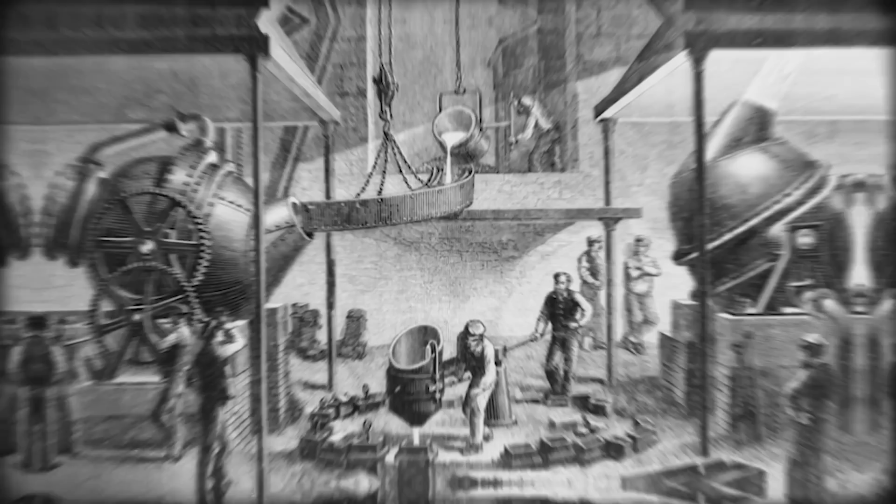Before the world knew Sweden for Spotify or IKEA, it was this steel company, Sandvik, that was quietly changing the world from deep inside the earth. This is a story about a company that always moved forward, from the first steel mill in a frozen Swedish village to inventing tools that mine deeper, cut harder, and last longer than anyone else's. They built the drills that carved the tunnels, the tools that built the factories, and the steel that built the modern world. And it all started with a bankrupt entrepreneur who gambled everything on a new way to make steel, a method so radical even his partners walked away. This is the story of Sandvik, the steel company that refused to stand still.

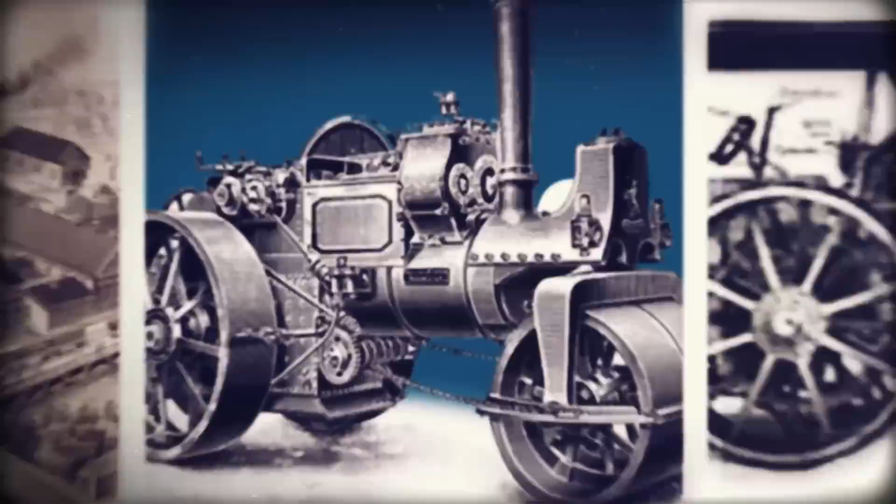In 1857 Sweden, Göran Fredrik Göransson heard about Henry Bessemer's failed steelmaking process. While others dismissed it as impractical, Göransson saw potential. His international travels through Europe and America gave him a perspective others lacked. He recognized this flawed technology could revolutionize steel production if modified correctly.

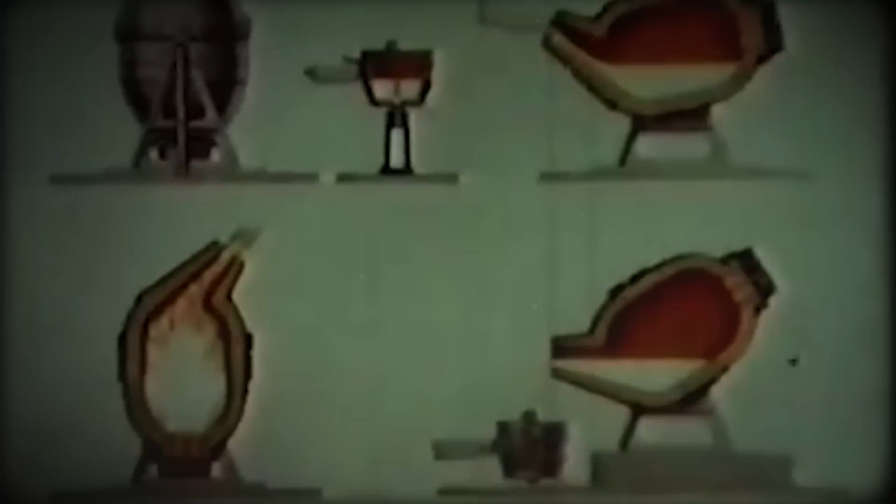May 20th, 1857 is an important date in the history of Swedish steel. That is the day it was confirmed that Göransson from Gävle in Sweden had bought a fifth of Henry Bessemer's incompletely developed patent. Experts claimed industrial-scale steel production was impossible. The process couldn't maintain high temperatures and produced brittle steel filled with air pockets due to impure pig iron. But Göransson's critical breakthrough came when he increased the air blast strength, successfully producing industrial-scale steel by 1858. His Swedish operation outperformed Bessemer's English attempts, making mass-produced steel economically viable worldwide.

This success led Göransson to found Högbo Stål & Jernwerks AB near Sandviken in 1862. He chose the remote location strategically for its iron ore, forests, and water power. There he built more than a factory. He created an entire industrial community with worker housing, schools, and hospitals in previously uninhabited land.

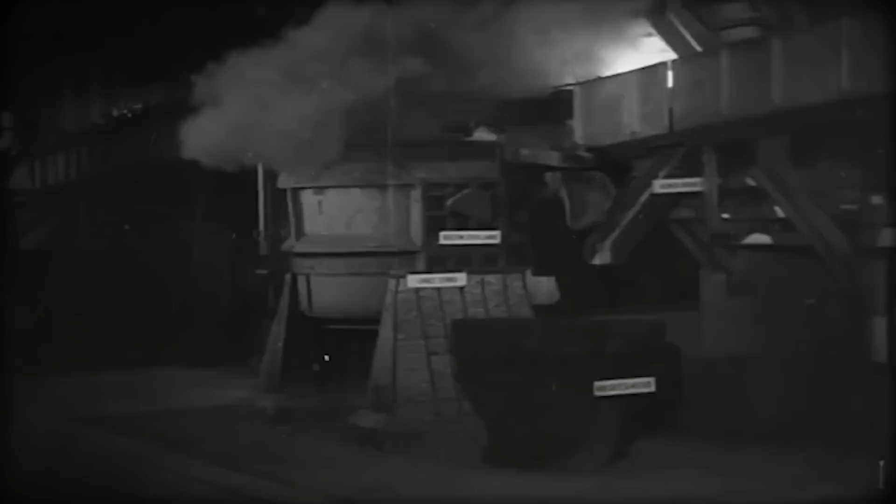The early years brought turbulence. In 1866, after just 4 years, the company went bankrupt when Göransson's main backer, Johan Holm, faced financial troubles. But in 1868, Göransson's son, Anders Henrik, restructured the business as Sandvikens Järnverks AB. The Sandvik name debuted publicly at the 1876 Centennial International Exhibition in Philadelphia.

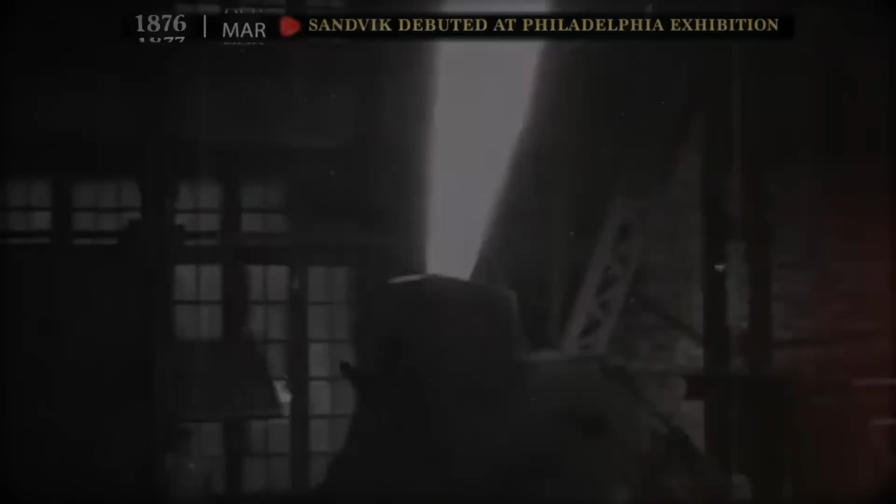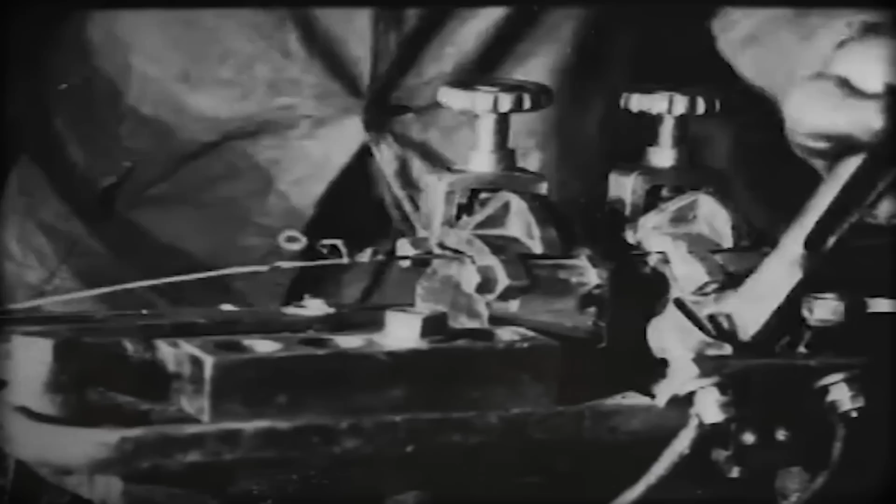Sandvik's early products built its reputation. Specialized drill steel became its first successful European export by 1878. The company also produced railway tracks, springs, wire, and precision components, each reflecting Göransson's commitment to solving industrial problems through innovation.

Göransson implemented unusually progressive worker policies, insisting families received equal rights to management. 'They have paid the same amount for their seats as the rest of us,' he declared, extending this philosophy to housing, education, and healthcare. These practices set a precedent for Scandinavian labor relations.

By 1901, Sandvikens Järnverks AB listed on the Stockholm Stock Exchange, transitioning from family enterprise to public company while maintaining its core values. This provided expansion capital and marked Sandvik's evolution into a modern corporation.

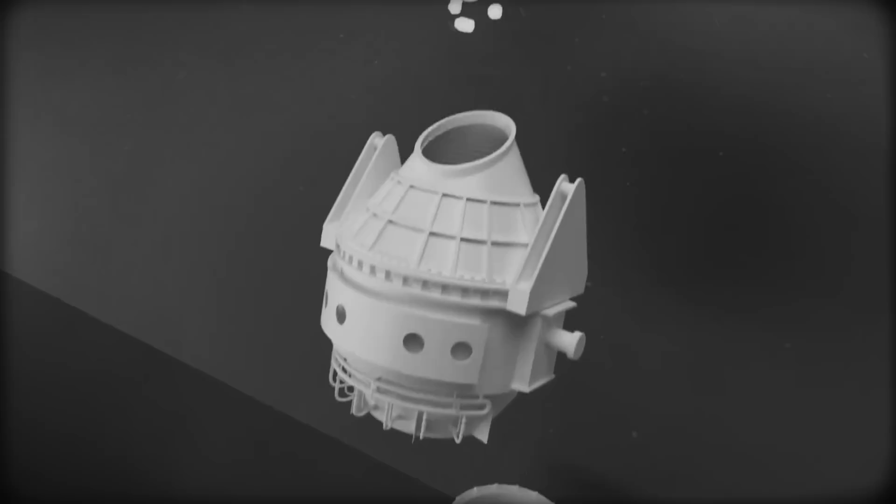Göransson's legacy blended technological risk-taking with social responsibility. His Bessemer process modifications unlocked cheap steel for industrialization, while his worker welfare programs proved factories could be both profitable and humane. This dual focus became Sandvik's DNA, outlasting competitors focused only on short-term gains.

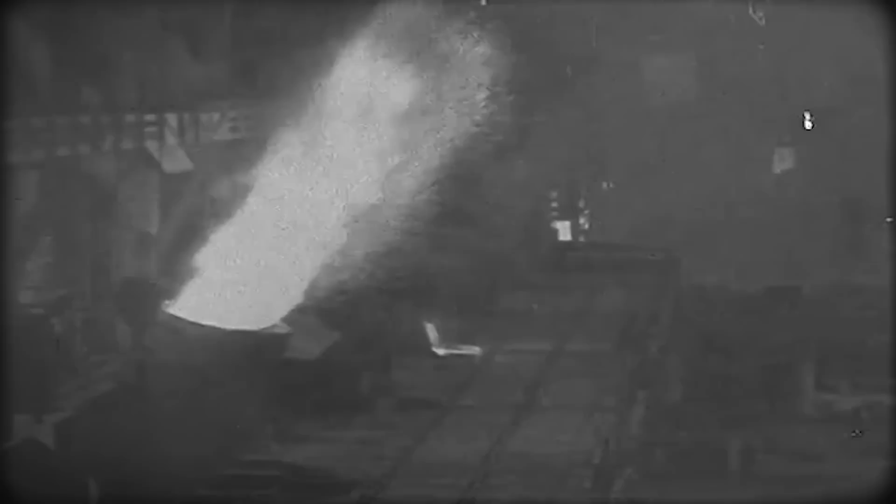Early challenges shaped Sandvik's resilience. The 1866 bankruptcy taught financial management lessons, balancing bold innovation with fiscal responsibility. Unlike contemporaries who viewed workers as expendable, Göransson invested in them as assets, giving Sandvik an edge in attracting skilled labor. Product development targeted practical needs.

Sandvik's rock drill steel solved mining challenges, while precision components met railroad industry demands. Rather than mass-producing generic goods, Sandvik specialized in engineered solutions, creating real customer value.

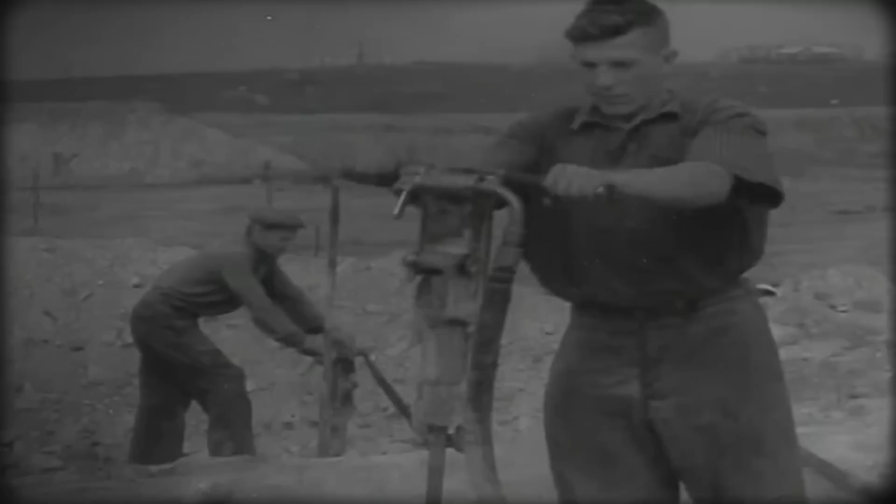International expansion began early. The 1876 Philadelphia exhibition introduced Sandvik to American markets, with its steel drilling equipment used in U.S. mines within 2 years. This global presence buffered against domestic fluctuations and positioned Sandvik as a worldwide supplier.

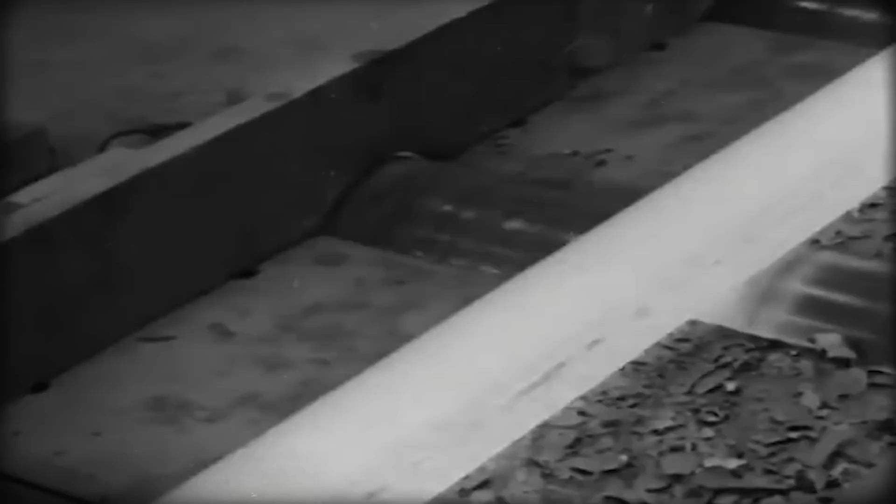Adaptability showed in the transition from charcoal to coal power as supplies dwindled. Rigorous quality control also differentiated Sandvik. Its steel's consistency built trust where competitors struggled with variable quality.

By 1900, Sandvik had survived crises, established global markets, innovated processes, and developed a skilled workforce. More importantly, it established a pattern: identify industrial problems, develop material solutions, and build delivery infrastructure.

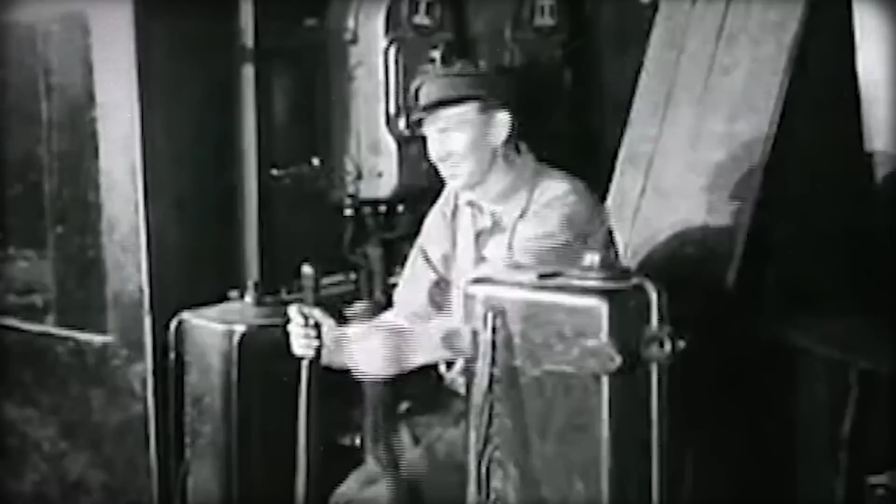Göransson's vision proved prescient. His experimental steelworks became a model for responsible industrial development, influencing Scandinavian labor relations for decades. The technological breakthroughs enabled previously impossible construction projects, creating an institution that would innovate for over 160 years.

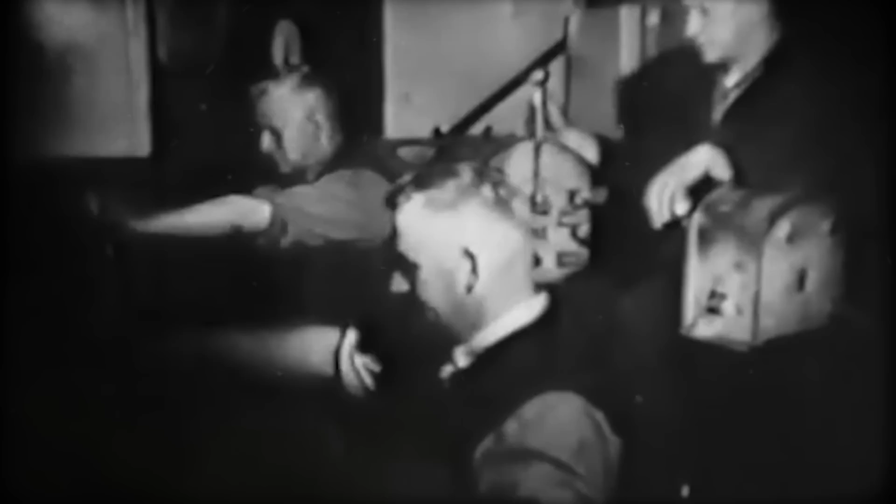At the century's turn, Sandvik was uniquely positioned, diversified in products and markets, with a culture balancing innovation and stability. This foundation would prove crucial facing 20th century challenges: world wars, depressions, and technological revolutions. The early principles, technical excellence, social responsibility, and global vision, provided the compass to navigate each new challenge successfully.

The year 1901 transformed Sandvik from a family steelworks into a modern corporation through its Stockholm Stock Exchange listing. This influx of capital funded revolutionary innovations, starting with steel conveyor belts that outperformed rubber and textile alternatives in harsh mining conditions. The belts became essential for continuous material transport with minimal maintenance.

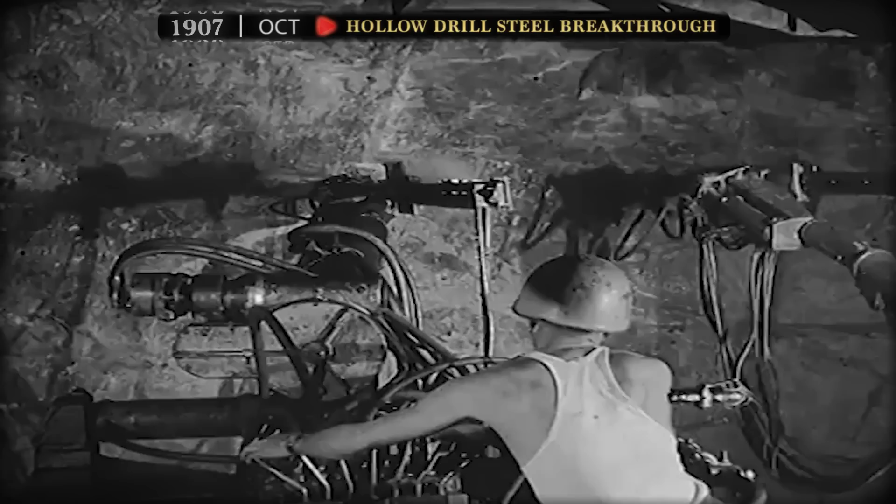Sandvik's 1907 hollow drill steel breakthrough demonstrated its engineering-first approach. Unlike competitors' solid drills, these tubes featured a central bore for injecting flushing fluids, cooling bits while ejecting rock cuttings. Miners achieved unprecedented drilling depths and speeds, establishing a new global standard. This willingness to rethink conventional solutions became a Sandvik hallmark.

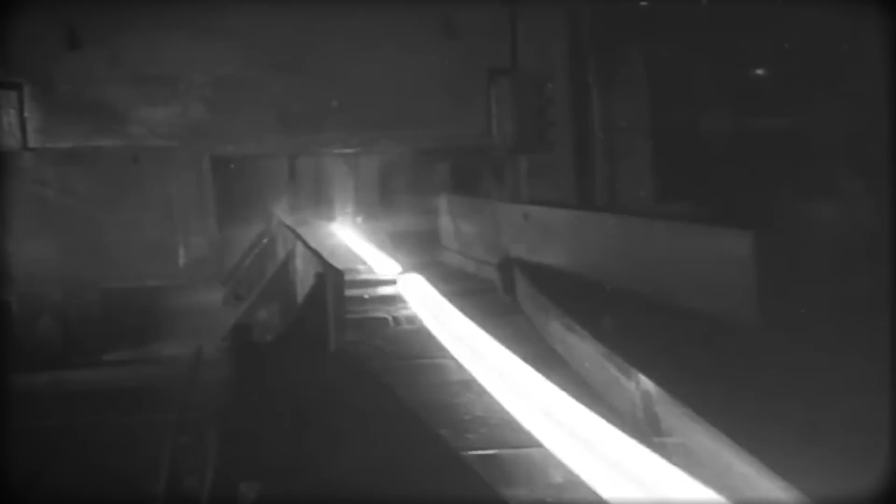When Carl Fredrik Göransson assumed leadership in 1920, his US-educated perspective brought scientific rigor to metallurgy. Despite post-World War I economic instability, he championed Sandvik's 1921 development of Sweden's first stainless steel. The expanded steel laboratory enabled this achievement, just as global demand surged across industries, from surgical instruments to railway tank cars requiring corrosion-resistant materials.

Göransson's Wednesday Club in the 1920s exemplified Sandvik's progressive culture, uniting management and workers to solve production challenges. This collaborative spirit fostered both innovation and workforce loyalty, a competitive edge when other manufacturers faced labor unrest.

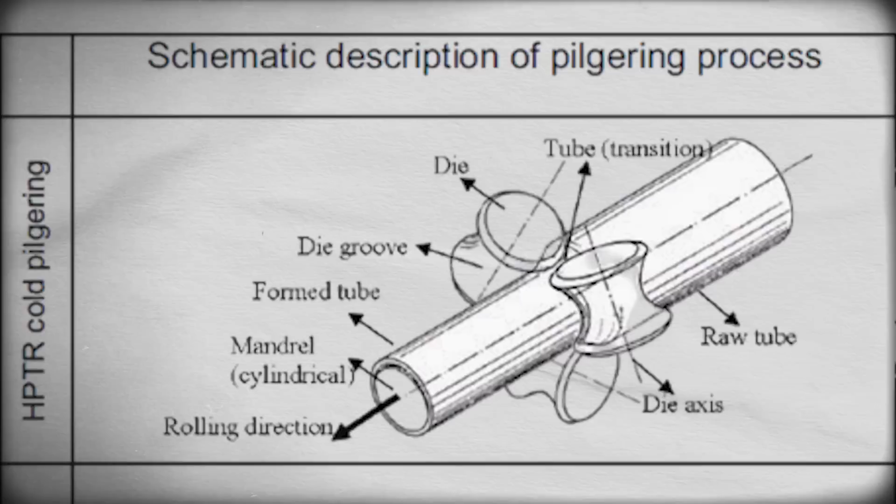The 1934 Pilgering process marked another milestone as Sandvik became Europe's first cold-rolling tube producer. This single-operation technique improved dimensional precision while slashing production time, differences visible to industrial customers' naked eyes. Like interlocking gears in a precision machine, each innovation built upon the last.

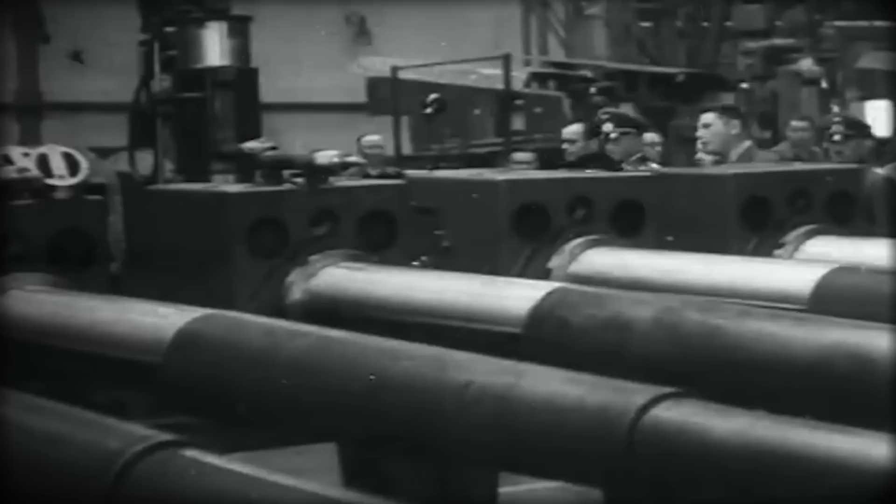World War II forced adaptation as exports halved, but military contracts for grenades maintained production. Sandvik used this period to refine cemented carbide expertise, knowledge that would dominate post-war manufacturing. Wilhelm Haglund's 1942 push into carbide tools birthed the Coromant brand, whose durable cutting tools soon transformed global factories.

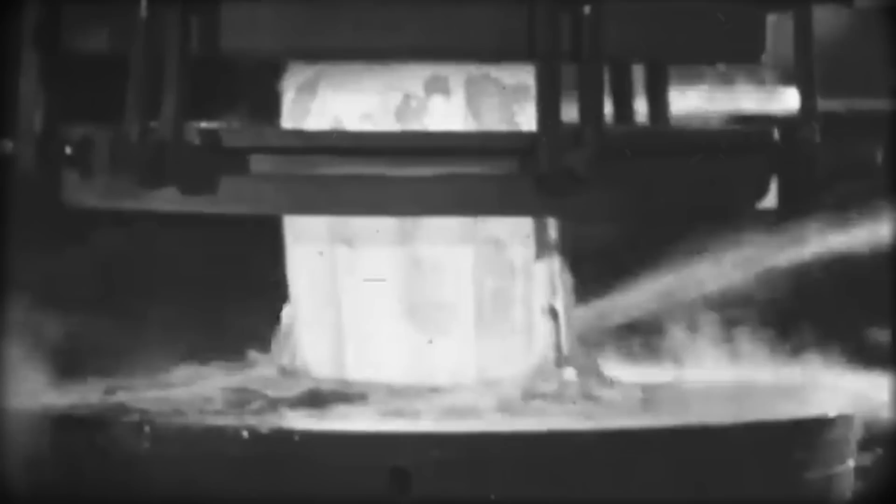Post-war expansion saw new facilities in Gimo and Västberga, while strategic subsidiaries extended Sandvik's reach across Europe and North America. This global network delivered local manufacturing with worldwide technical support, an unbeatable combination during Reconstruction's tool demand surge.

Sandvik's quality systems became legendary. Its advanced materials laboratory subjected every steel batch to rigorous testing, ensuring reliability for customers whose reputations depended on consistent performance. Financial prudence from 1866 near collapse allowed continued research and development even during the 1930s depression, when competitors retrenched.

The cemented carbide division exemplified Sandvik's persistence. Engineers developed proprietary machining techniques for this brittle material, creating tools that outlasted conventional options. By 1950, these innovations were revolutionizing metalworking worldwide.

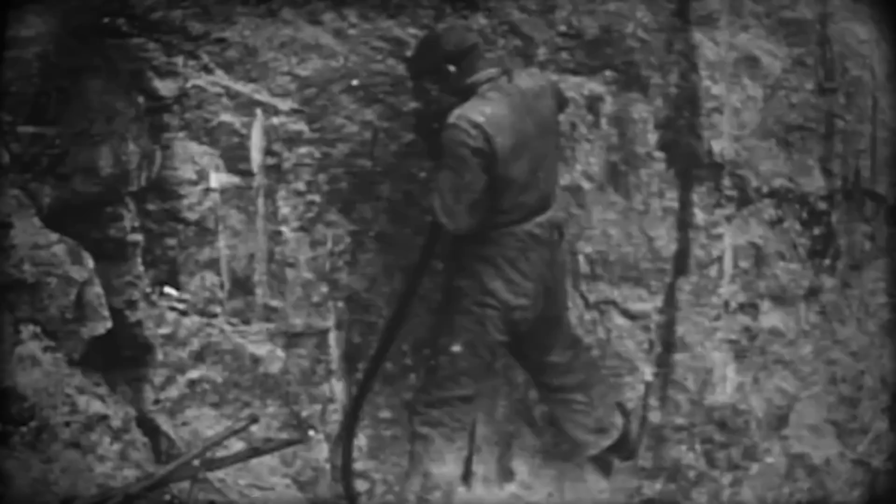Mining solutions evolved from simple drill bits to integrated systems addressing real operational challenges: faster penetration, extended tool life, reduced downtime.

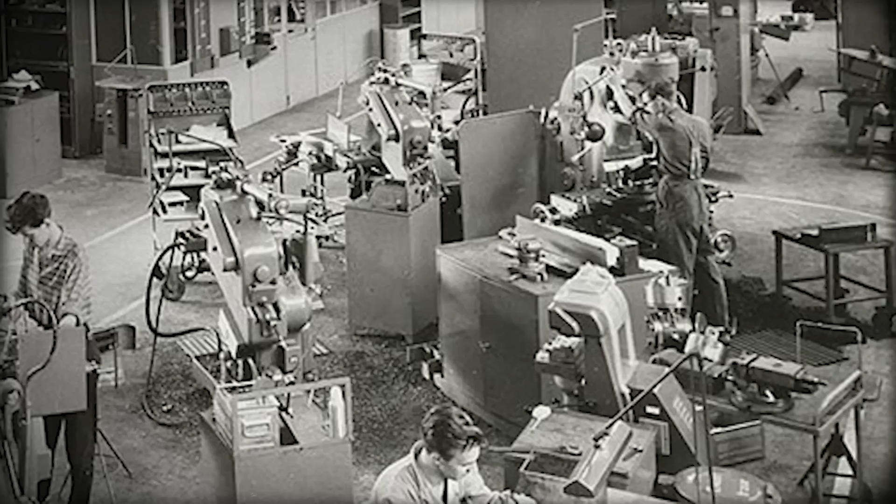International growth followed a deliberate pattern, with each acquisition filling specific technical gaps rather than pursuing scale for its own sake. By mid-century, Sandvik had become a multinational technology leader, its product lines interconnecting like components in a well-oiled machine.

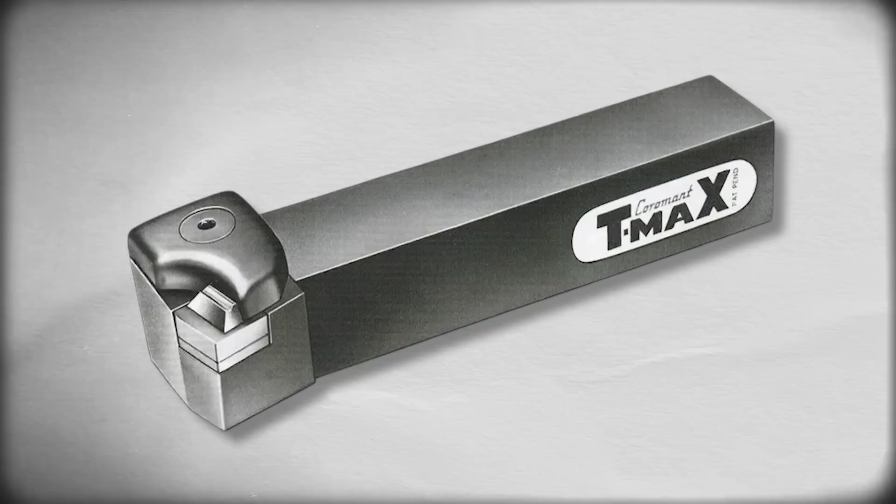The foundations laid during these decades in material science, manufacturing processes, and global operations would drive future breakthroughs like the 1957 T-Max tool holder. This evolution appeared seamless because it adhered to enduring principles: invest in people, solve real problems, and relentlessly improve technology. When you use stainless steel appliances or benefit from modern mining infrastructure, remember, these conveniences exist because a Swedish company kept advancing while others stood still, and this was merely Sandvik's first act.

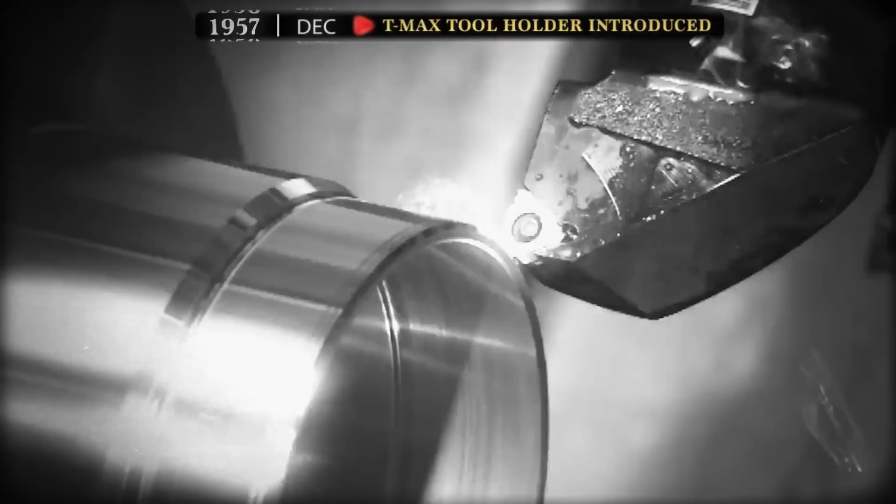The 1960s opened with Sandvik's T-Max tool holder changing factory floors everywhere. This invention let machinists switch cutting bits in seconds instead of minutes. But what few realized was this tool marked just the start of Sandvik's biggest transformation yet.

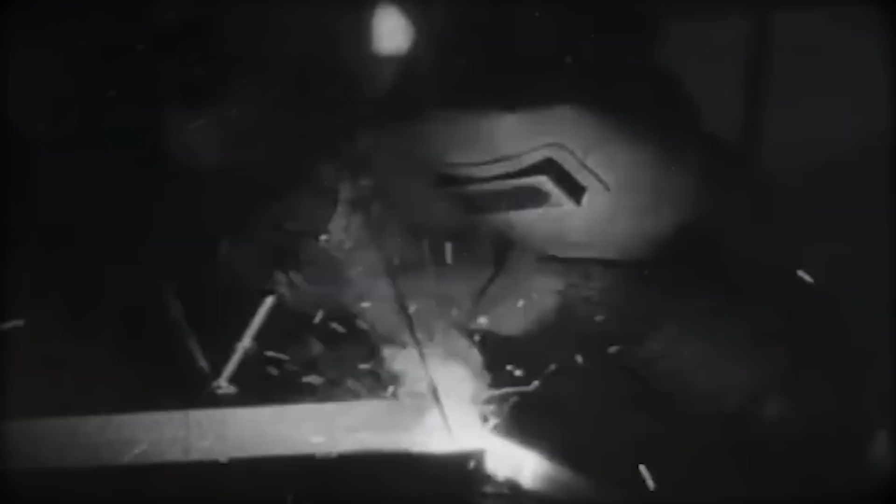Over the next 30 years, the company would remake itself completely, from a Swedish steel specialist to a global technology leader. Post-war factories needed better tools to keep up with demand. Sandvik had spent World War II improving cemented carbide technology while others focused on wartime production. Now that preparation paid off.

Cemented carbide tools cut faster and lasted longer than steel, but Sandvik was still seen as a steel company. Leadership faced a choice: stay with what made them successful or bet everything on this new material. They chose the gamble. In 1962, Sandvik opened its first overseas cemented carbide plant in the UK.

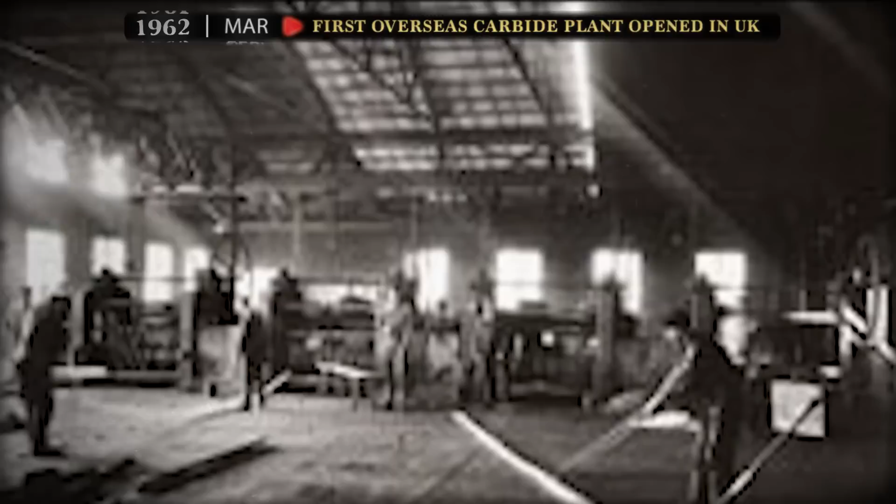Other factories followed: Germany, France, the US, even South Africa. Each facility tailored products for local industries. German plants made precision components for machine tools, while American facilities focused on mining equipment. Sandvik didn't just export, it became part of each market.

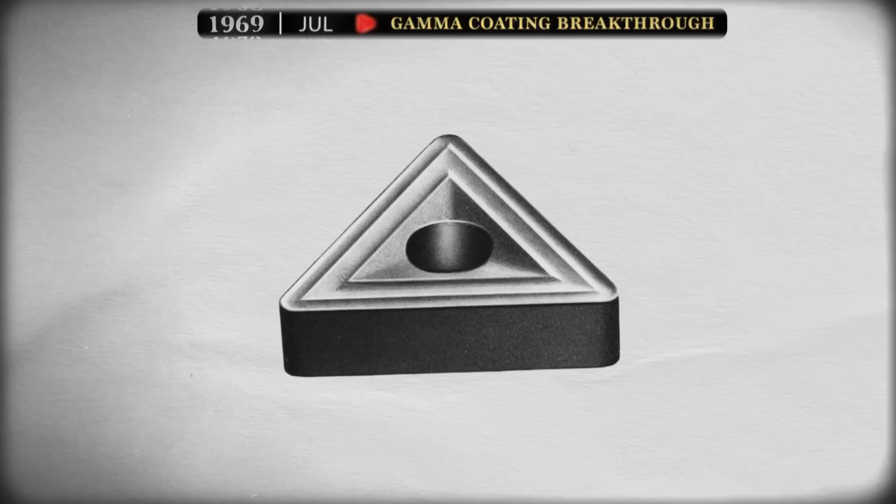Then came the 1969 gamma coating breakthrough. By adding a microscopic titanium carbide layer to cutting tools, Sandvik engineers tripled tool life. Machinists could now cut harder metals at higher speeds without stopping. Factories increased output while cutting costs, a game-changer for production managers struggling with downtime.

Sandvik made a symbolic change in 1972, shortening its name from Sandvikens Jernverks AB to Sandvik AB. Steel was now just one part of a broader technology portfolio. The new name signaled this wasn't grandfather's steel company anymore.

Acquisitions expanded capabilities strategically. The 1976 purchase of German toolmaker Hertel brought new machining techniques and a stronger foothold in Europe. Other deals added rock drilling expertise and automation know-how.

Unlike competitors buying just to grow, Sandvik targeted additions that strengthened the whole business. When the 1973 oil crisis hit, most industrial firms slashed research budgets. Sandvik did the opposite. While others retreated, it kept investing in technology and global facilities. This gamble paid off. When economies recovered, Sandvik had new products ready while competitors scrambled to catch up.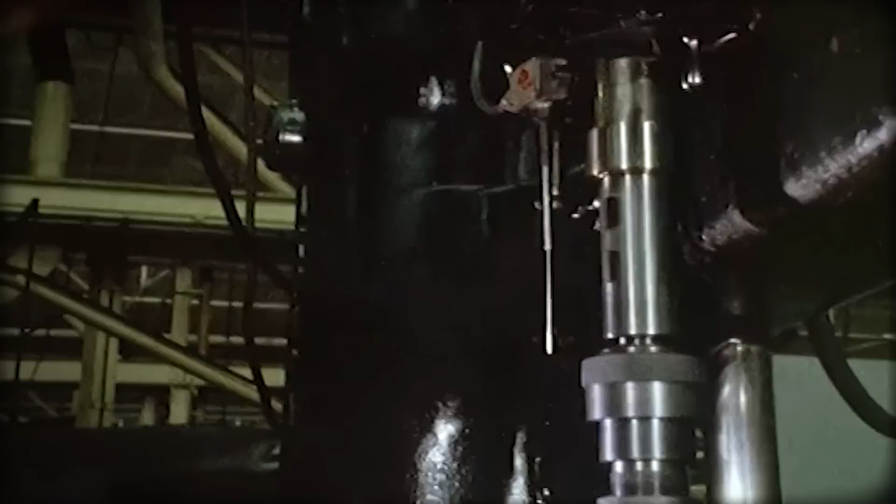By 1980, the transformation was complete. What began as a single steel mill now operated in 14 countries. Most importantly, Sandvik had become a different company. Instead of selling materials, it provided solutions. Engineers worked directly with customers to solve manufacturing challenges.

The numbers showed the shift. In 1950, cemented carbide was 15% of Sandvik's business. By 1980, it was nearly half. Mining equipment had grown equally important, while specialty steels became one segment among many.

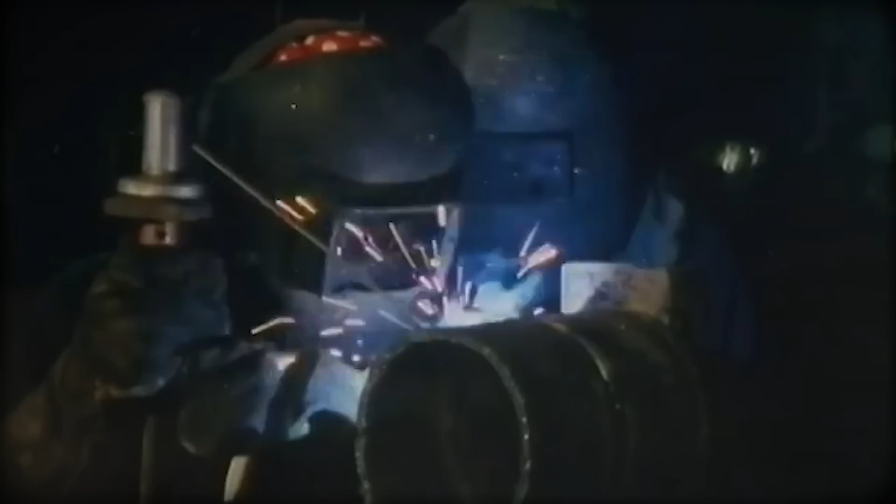Worker training kept pace. Sandvik established technical schools near factories, teaching not just machine operation but material science. This deep understanding set Sandvik apart. Competitors could copy products, but not the knowledge behind them.

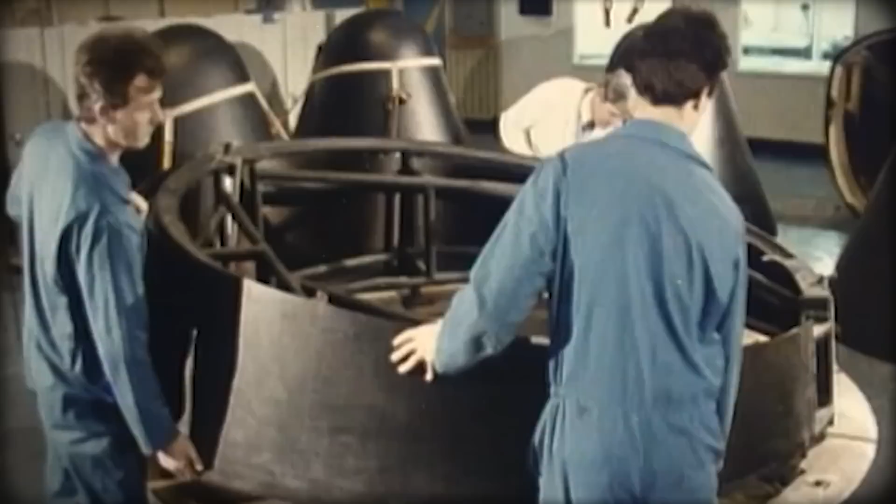Quality reached new heights. X-rays checked for microscopic defects. Lasers measured edges to millionths of a meter. Aerospace and automotive customers depended on these tolerances. Lives literally rode on them.

Sandvik rethought global service. Local plants manufactured core products while drawing on central research and development. Headquarters supplied advanced materials, while regional factories adapted solutions locally.

Environmental efforts emerged quietly. Sandvik reclaimed grinding sludge to recover tungsten and implemented closed-loop water systems. These weren't PR moves, just practical ways to cut waste and costs.

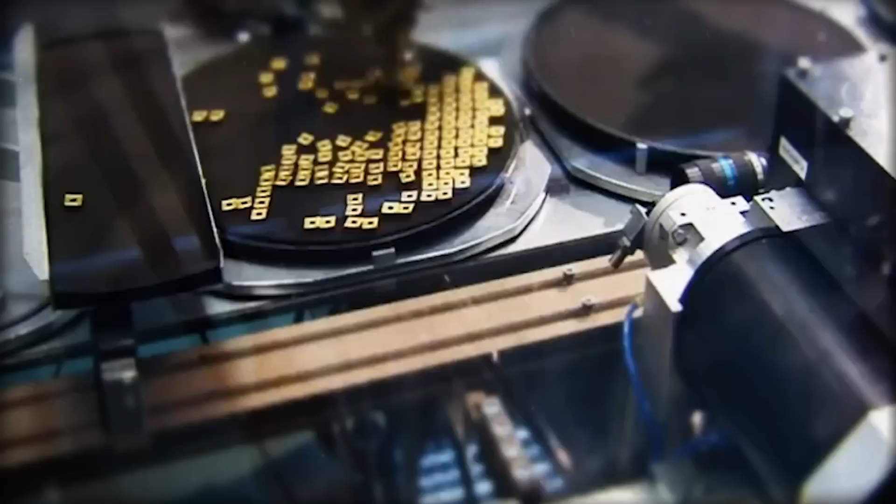Standardization created efficiencies. Tool holders from Germany fit machines made in Japan. Modular designs gave manufacturers flexibility while simplifying inventory.

The workforce globalized. Management blended local talent with Swedish experts, creating a cross-pollination of ideas. Brazilian engineers might suggest improvements later adopted in Finland.

By decade's end, Sandvik had mastered reinvention. The steel producer of the 1950s was now a global problem solver. This mindset, helping customers succeed, not just selling products, would drive future growth.

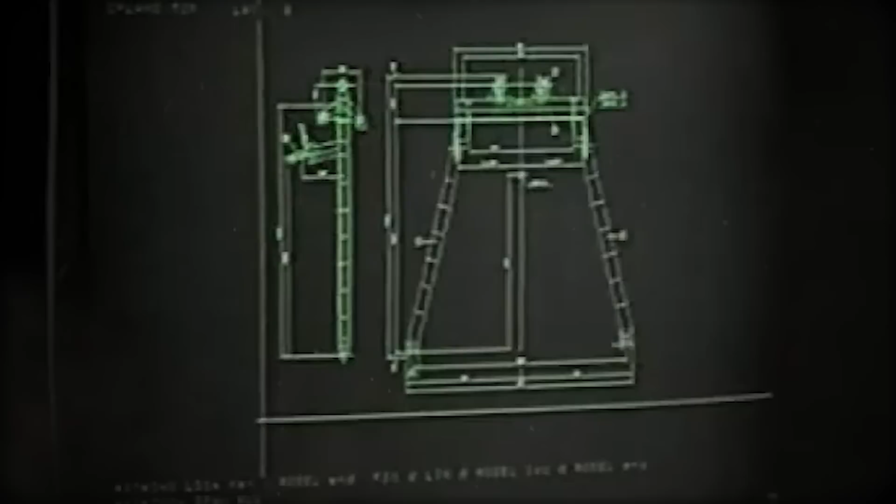Looking back, the change appeared seamless. No massive layoffs, no dramatic rebranding. Each step built logically on the last, guided by the same principles: technical excellence and practical thinking applied to ever wider challenges. This pivot created the modern Sandvik, no longer tied to one material, product, or market.

While most 1950s competitors vanished, Sandvik thrived by refusing to stand still, a lesson that would prove invaluable in the decades ahead.

The 1980s opened with Sandvik straining against its own success, a steel giant shackled by centralized control. With 30,000 employees across 14 countries, all reporting to Sweden, decisions moved slower than the markets they served. Asian competitors gained ground as digital technologies reshaped factories. The old model was breaking.

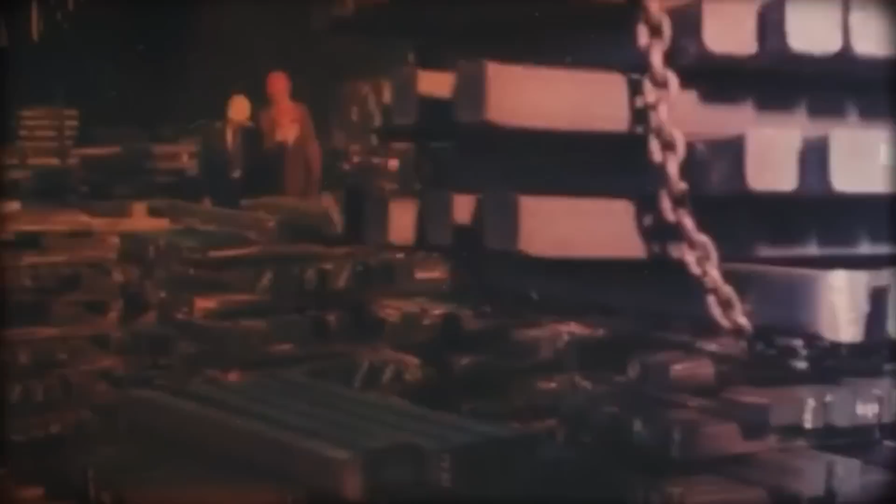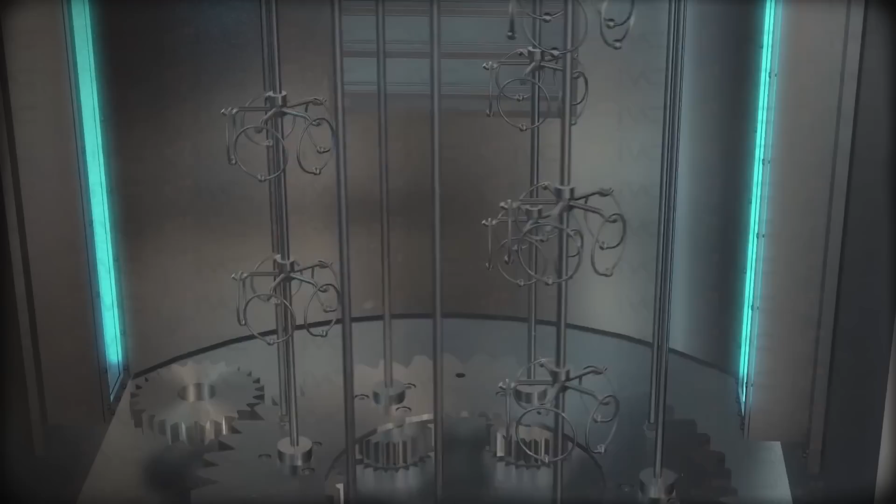By 1988, the Carbide division created PVD-coated inserts that handled previously impossible speeds. A titanium nitride coating, just 2 to 4 microns thick, extended tool life by 300%. Factories worldwide could suddenly machine tougher materials faster with less downtime.

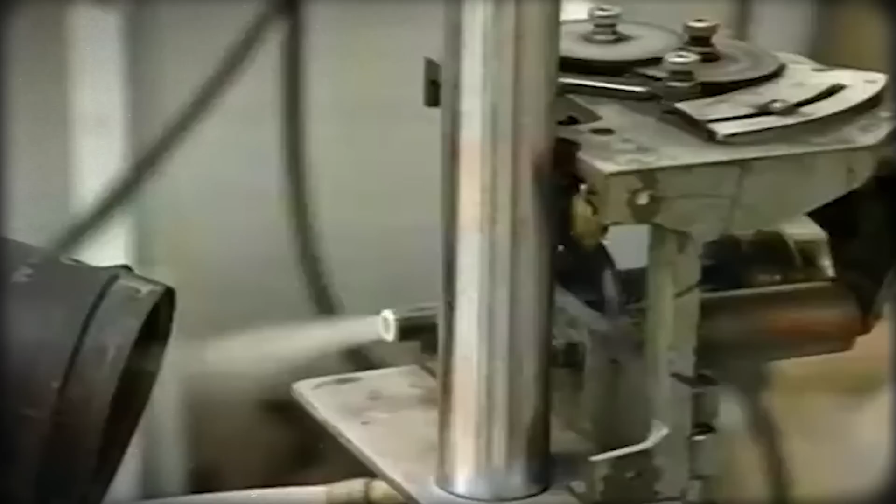When Eastern Europe's borders opened in 1989, Sandvik acted decisively. They didn't just sell tools, they rebuilt entire production systems. Polish steel mills got Sandvik automation alongside traditional equipment. Czech factories received training programs with their new machines. These partnerships became blueprints for emerging market strategies.

Multi-layer coatings arrived in 1992, each stratum engineered for specific heat or wear resistance. Soon, single factories produced hundreds of specialized tool variants, all meeting identical quality thresholds.

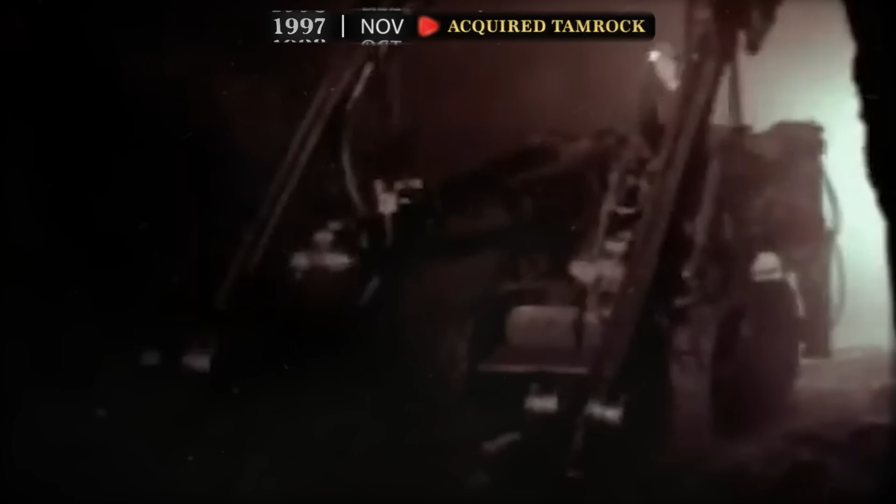The 1997 Tamrock acquisition transformed Sandvik's mining business. Overnight, they offered complete systems, drills plus bits, combining Tamrock's mechanical designs with Sandvik's material science. That same year's Kanthal purchase added heating technology, enabling new high-temperature alloys for industries from glassmaking to food processing.

But Barnevik's boldest move came in 1999, selling the profitable saws and tools division. Consumer products no longer fit Sandvik's industrial focus. This surgical cut freed $150 million annually for core R&D, proving that even cash cows could be sacrificed for long-term strategy.

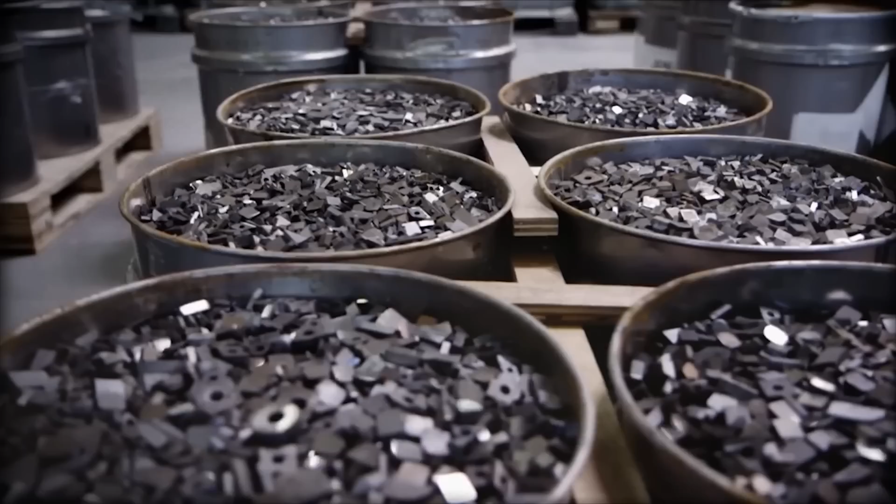By 2000, Sandvik had streamlined to 3 global divisions: tooling, mining, and specialty steels, each with local decision-making. The chaotic sprawl of the 1980s was now a precision instrument. Revenues grew 8% annually despite divestitures, while profit margins expanded from 6% to 12%.

Decentralization's genius lay in balance. South African mining tools differed from Canadian versions, yet both used shared metallurgy breakthroughs.

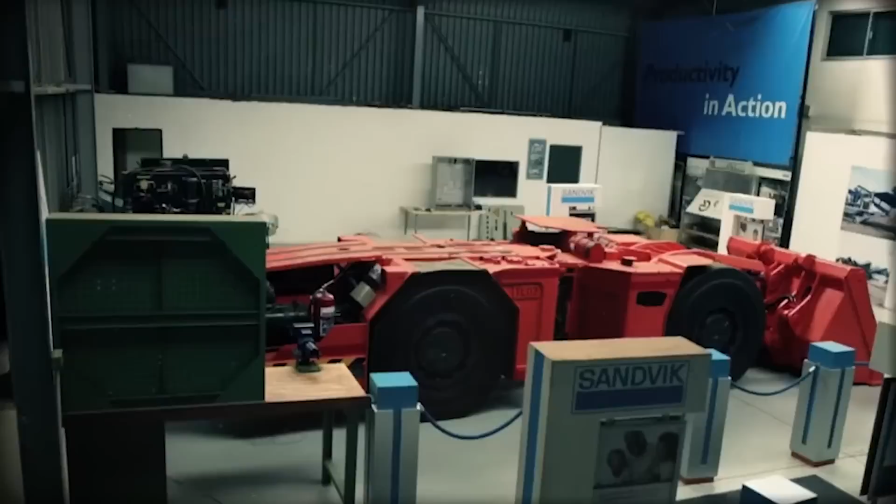Eastern Europe became Sandvik's innovation lab. Modernizing Polish mills revealed how traditional steelmaking could integrate with automation. Czech projects proved the value of combined equipment and training packages. These lessons later guided expansions into Asia and South America.

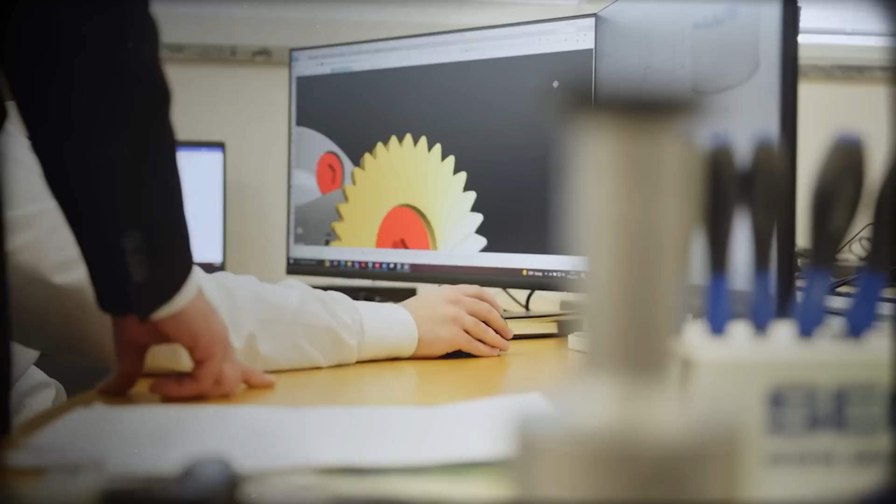Quality systems leaped forward. Automated measurement reduced human error by 40%, while customer feedback loops let engineers refine designs based on real-world performance. Environmental efforts went beyond compliance. Tungsten carbide recycling began a decade before regulations required it, cutting costs while future-proofing operations.

The workforce transformed alongside technology. Technological training centers taught the science behind machines, empowering workers to suggest improvements. Brazilian engineers rotated through Swedish labs, then applied insights back home. This cross-pollination sparked unexpected innovations.

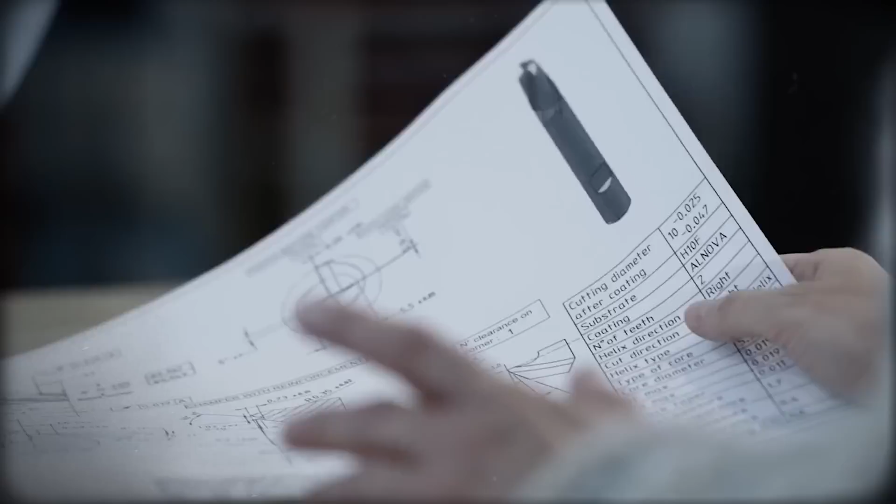Customer relations deepened from transactions to partnerships. Sandvik engineers worked on factory floors solving production challenges. One such collaboration revealed the need for faster titanium machining, leading to the breakthrough PVD coatings that later dominated aerospace tooling.

Financial discipline matched technological ambition. Strict capital allocation ensured research and development investment solved real customer problems. No pet projects survived on corporate goodwill.

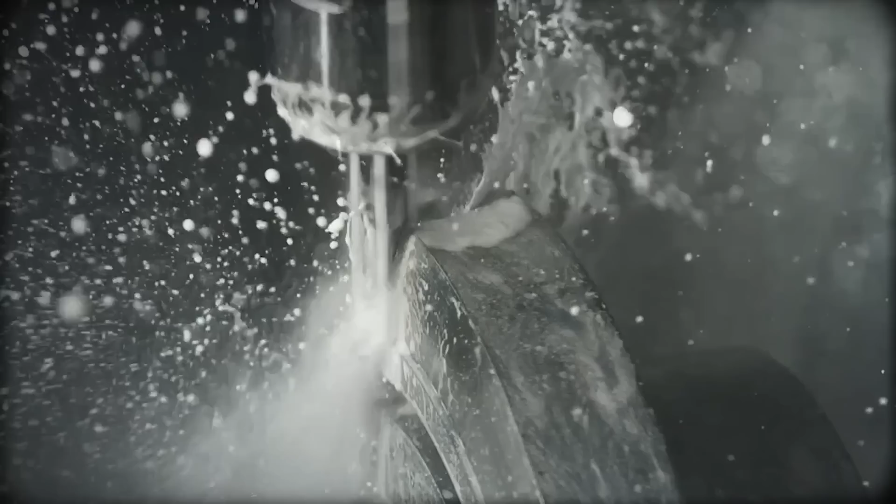Success metrics shifted from production volume to customer impact. A new tool saving 15% machining time mattered more than units shipped. This 20-year transformation repositioned Sandvik from steel producer to solutions provider.

When digitalization arrived in the 2000s, their decentralized structure proved ideal. Business units could adopt new technologies rapidly while leveraging group R&D. The stage was set for autonomous mining systems and AI-driven tool optimization.

Historians would later note the timing's perfection. Sandvik's restructuring concluded just as industry stood on the digital brink. By making painful cuts and bold bets, they didn't just survive upheaval, they helped define it.

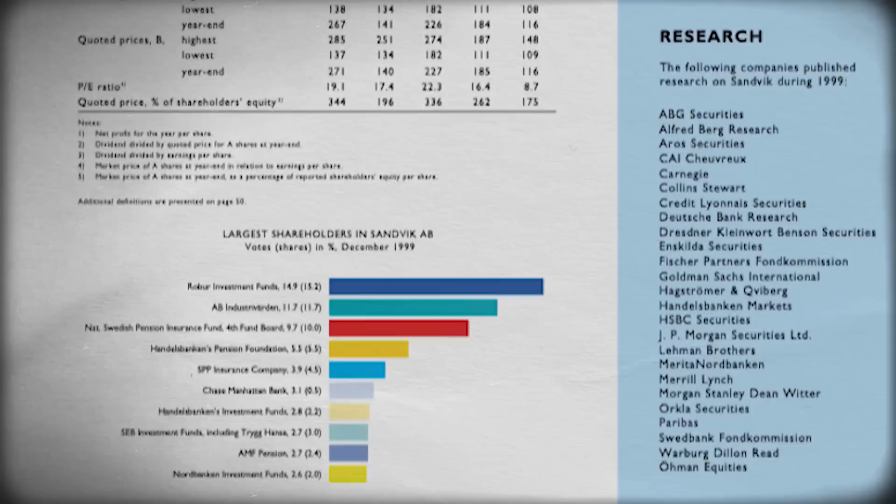The numbers told the story: 12 consecutive years of margin growth, with technologies embedded in customers' core operations worldwide. The giant had not just broken its chains, it had learned to dance.

The year 2001 marked a quiet revolution at a Finnish nickel mine where Sandvik's new AutoMine system operated heavy equipment without human operators underground. This represented a complete rethinking of mining operations, like a conductor assembling a digital orchestra where each machine played its precise role in perfect harmony.

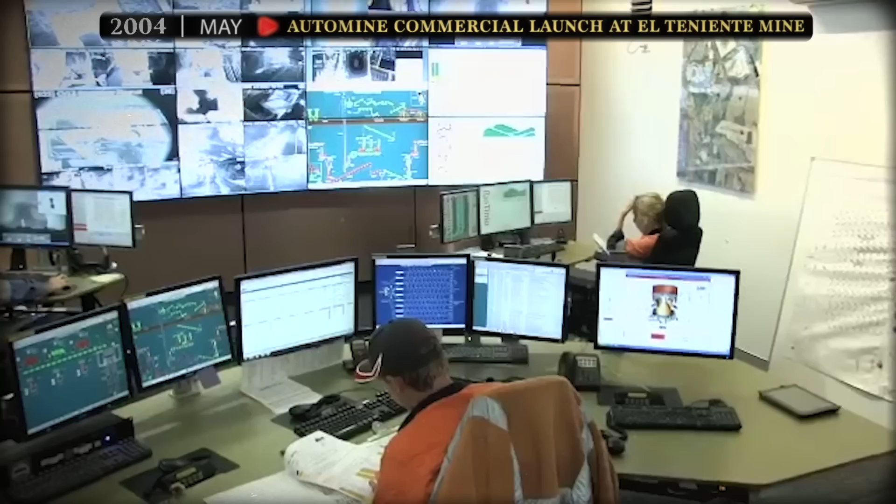While competitors focused on incremental upgrades, Sandvik bet on automation that would redefine the industry. By 2004, this symphony of machines was performing commercially at Codelco's El Teniente copper mine in Chile. Workers moved from dangerous underground environments to control rooms, immediately improving safety.

But the real surprise came when automated loaders maintained steady 24/7 production, outperforming human-operated equipment. The system's success proved automation could deliver both safety and productivity gains.

Sandvik amplified its capabilities through strategic acquisitions. The 2002 purchase of German toolmaker Walter AG expanded their cutting tool portfolio, while providing machining data across additional industries. Combined with their Seco Tools division, Sandvik gained unprecedented visibility into global manufacturing processes.

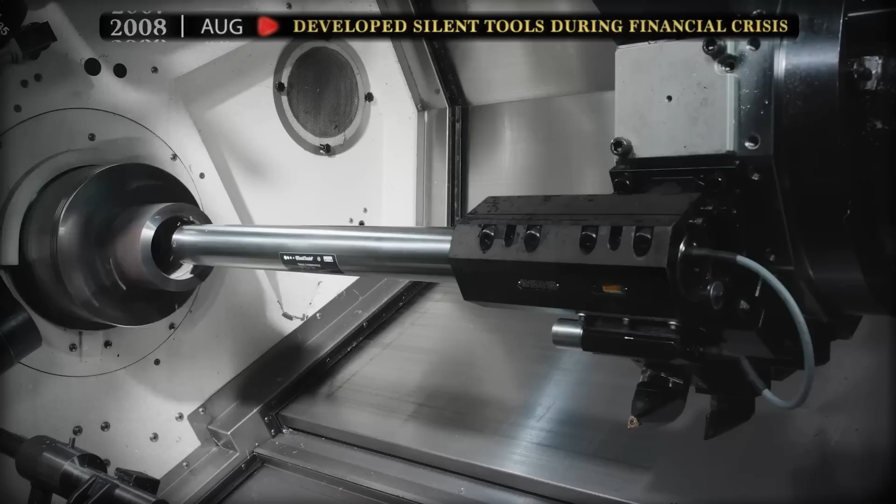When the 2008 financial crisis hit, Sandvik doubled down on innovation while others retreated. Their development of Coromant silent tools, vibration-dampening tool holders for precision aerospace and medical components, positioned them perfectly for the coming recovery. This commitment to research and development during downturns became a hallmark of their strategy.

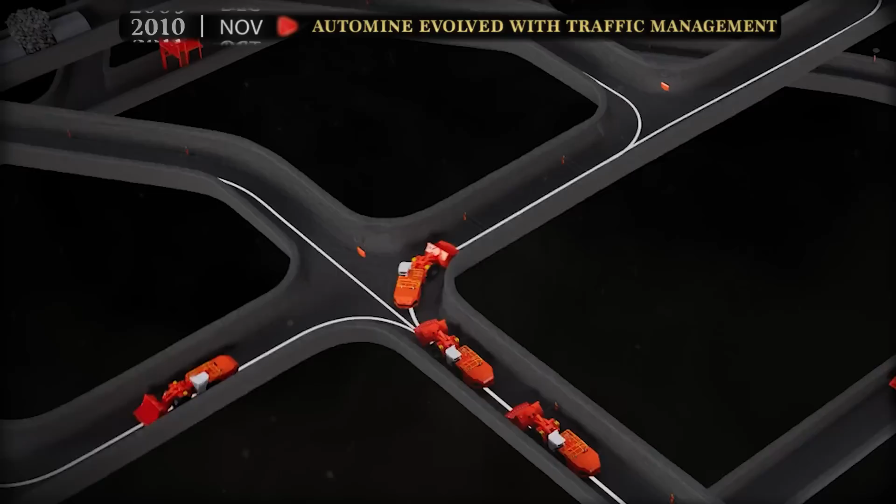The 2017 launch of Sandvik's digital machining division marked another movement in this symphony. Their CoroPlus tool library provided real-time cloud updates, allowing factory managers to optimize entire processes remotely. Vibration analysis from silent tools now predicted maintenance needs, preventing failures before they occurred.

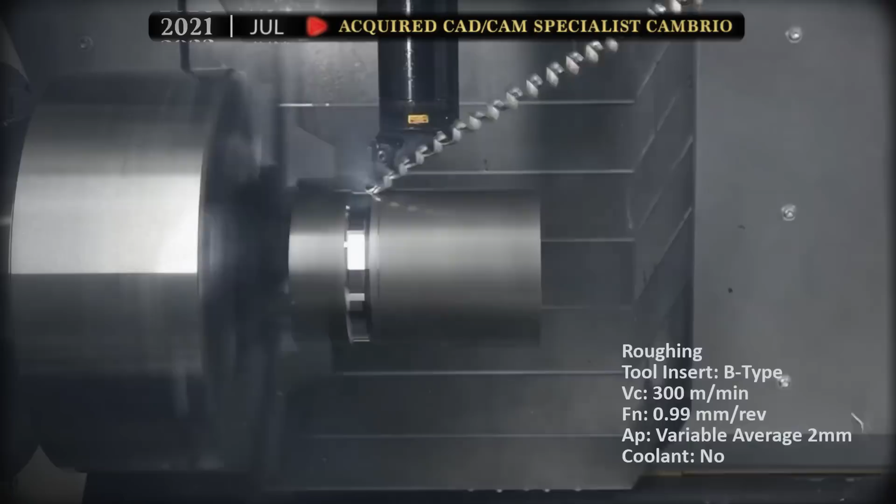Sandvik's 2021 acquisition of CAD/CAM specialist Cambrio added another section to the orchestra, enabling complete digital workflows from design to production. The 2022 spin-off of Alleima completed their transformation into a focused technology provider, freeing resources for digital and automated innovations. Today, this digital orchestra plays across global industries.

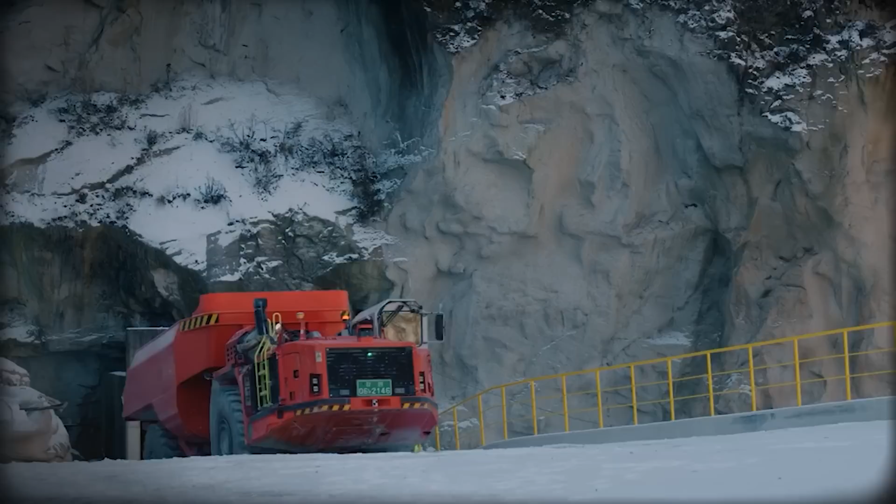Sandvik's automated mining systems connect not just to operators, but to each other, coordinating movements within complex underground networks. Safety improvements have been dramatic, with mines reporting significant reductions in accidents and injuries.

The manufacturing side performs equally impressively. Sensor-equipped tools feed performance data to the cloud, creating closed-loop systems that continuously optimize based on real-world results. This digital integration helps manufacturers reduce material waste by up to 80% in some applications while cutting energy use.

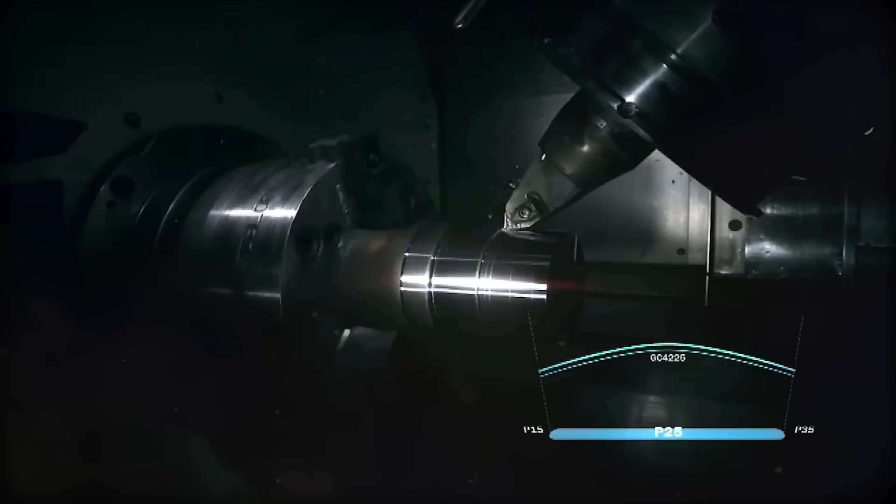The financial impact shows the power of this approach. Digital offerings generated SEK 5.1 billion in 2024 revenue, on track for SEK 6.5 billion by 2025.

Their manufacturing co-pilot, developed with Microsoft, uses generative AI to optimize processes in real time, the latest movement in Sandvik's ongoing innovation symphony. Worker training has adapted to this digital reality, blending data analysis with traditional skills.

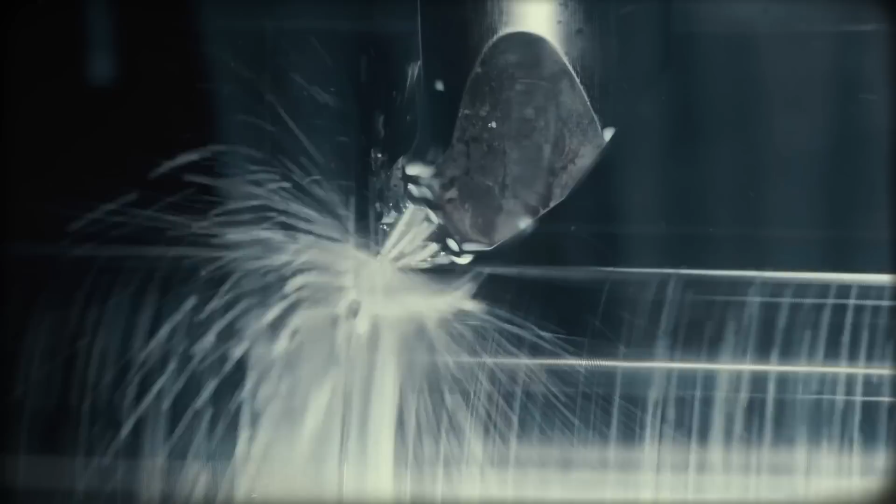Supply chains have digitized too, with connected systems monitoring inventory and automatically triggering replenishment. These innovations reduce downtime while cutting excess inventory costs.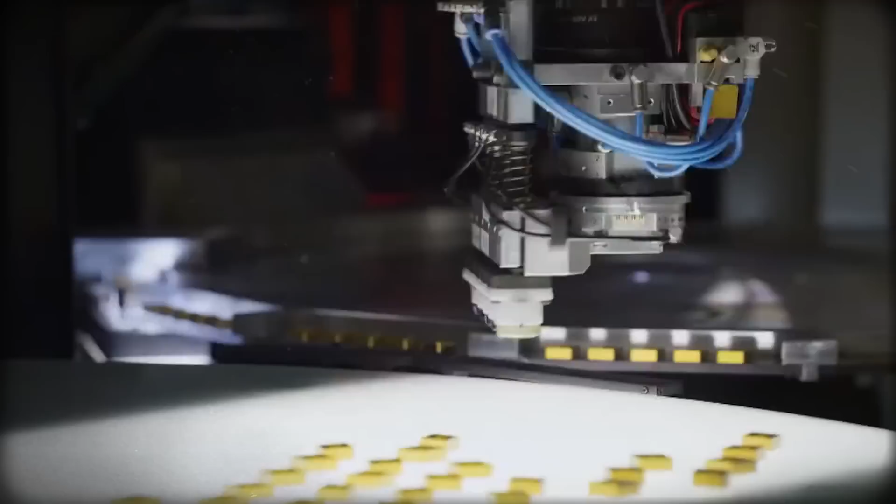Cross-industry synergies create unexpected harmonies. Mining automation techniques find applications in construction, while manufacturing algorithms improve medical device production. Sandvik's broad portfolio enables narrowly focused innovations competitors can't match.

Looking ahead, Sandvik continues composing the future of digital industry. Autonomous systems will replace dangerous work, AI will optimize processes, but the core principle remains unchanged since 1862: solve industrial problems through technical innovation.

The steel mill of the past couldn't imagine today's global technology leader, but both share the same innovative spirit that keeps this digital orchestra playing ever more complex and productive symphonies.

For 160 years, a Swedish company you've probably never heard of has shaped how we build our world. Sandvik's components exist in everything from skyscrapers to smartphones, yet the name remains unknown to most. This paradox defines Sandvik, a hidden giant whose innovations enable progress while staying invisible to the end user.

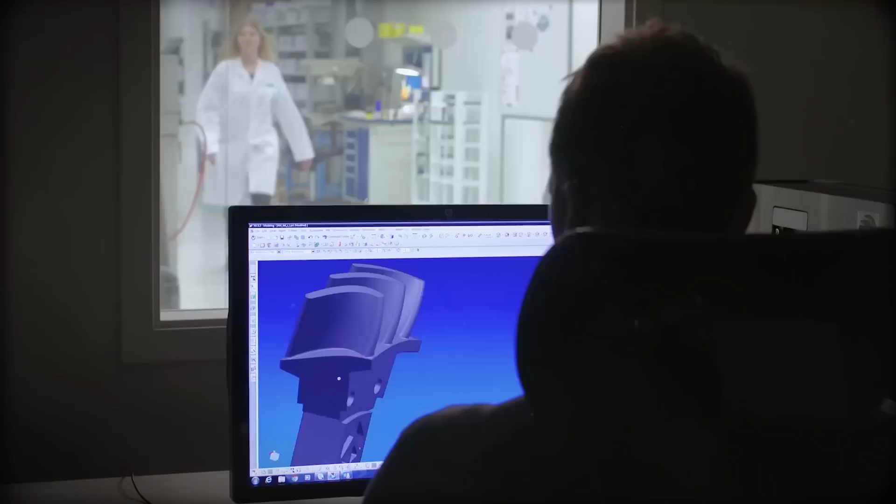Imagine the gears inside a clock, small, precise, unnoticed, yet essential to keeping time. Sandvik operates similarly, powering modern life through three transformative innovations: precision steel that birthed mass production, carbide tools that cut machining times in half, and automated mining systems that extract resources with surgical accuracy. These breakthroughs didn't seek applause, they solved real problems quietly.

This anonymity reflects Sandvik's philosophy. While tech companies chase headlines, their tools have reduced factory material waste by 80%. Their mining systems boosted productivity 30%. Modern Sandvik tools last 4 times longer than 1950s models. These numbers aren't marketing, they're measurable impacts echoing through workshops and mines worldwide.

Göran Fredrik Göransson's 19th century vision still guides them. His company towns provided housing and schools when competitors exploited workers. Today, that same thinking recovers 80% of materials from used tools. Sustainability isn't a trend for Sandvik, it's their operating system.

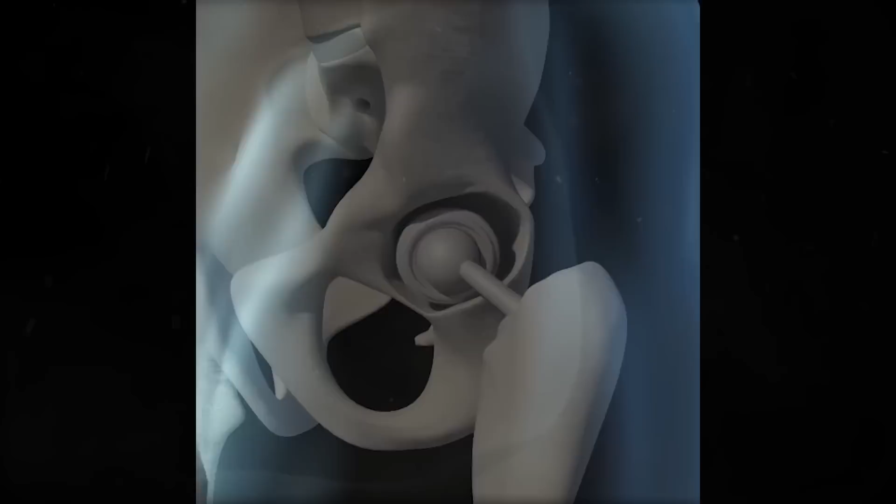Their fingerprints appear in unexpected places. The alloy in your hip replacement, originally developed for drill bits. Wind turbine blades withstand storms thanks to materials created for offshore rigs. Even Mars rovers rely on Sandvik's specialty steels. When you solve fundamental problems, solutions cross industries naturally.

What's astonishing is their consistency through radical change. From steelmaker to digital solutions provider, Sandvik kept one question central: what challenge are you solving? This focus helped them outlast competitors who clung to the past or chased fads.

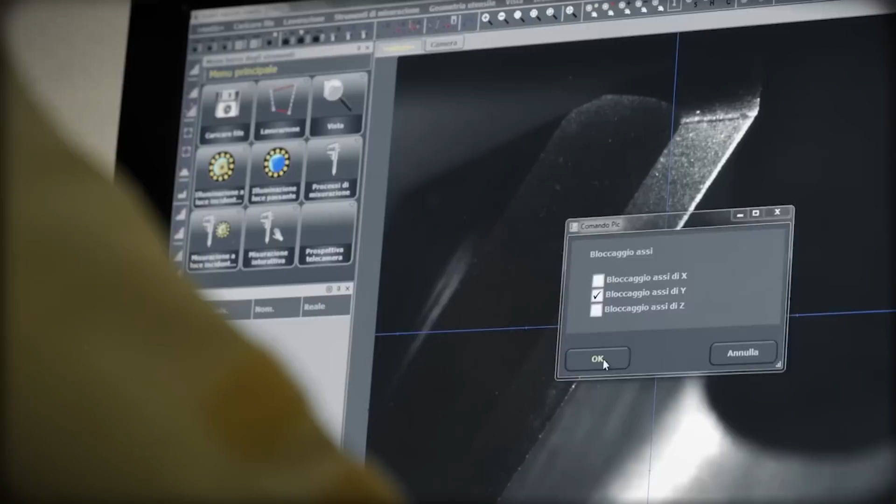Today's global network spans 150 countries, sharing knowledge as much as products. A breakthrough in Chilean copper mines might revolutionize German car factories months later. Local teams adapt technologies while tapping into worldwide expertise, like a neural network for industrial problem-solving.

Walk through any modern factory and you'll witness Sandvik's legacy. Their diamond-tipped drills shape skyscrapers. Their automation protects miners, yet their logo rarely appears. Their impact lives in what products enable, not branding.

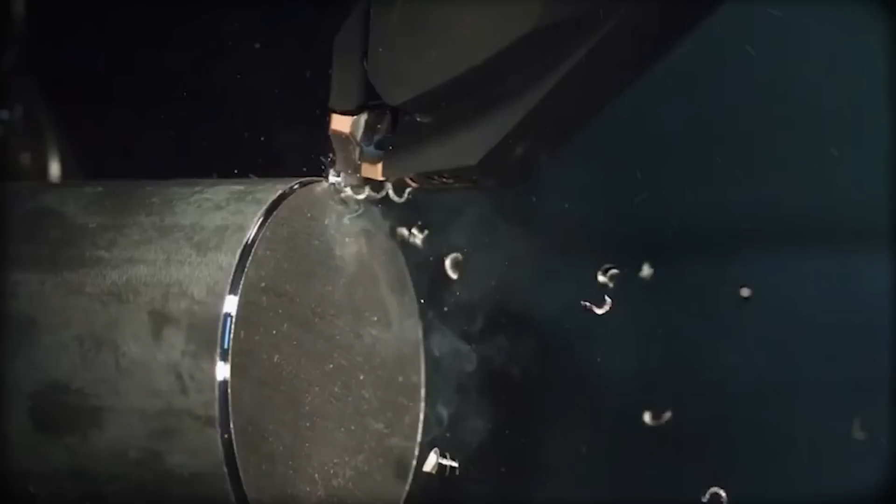Take their circular economy programs. Used tools get reborn as new products worldwide. This isn't greenwashing, it's the same practical mindset that built those company towns. Waste represents unsolved problems, and Sandvik engineers live to solve them.

Financial stability fuels their long-term thinking. Unlike startups chasing quarterly growth, they've maintained R&D through wars and recessions. New ideas take years. Sandvik structures itself to wait.

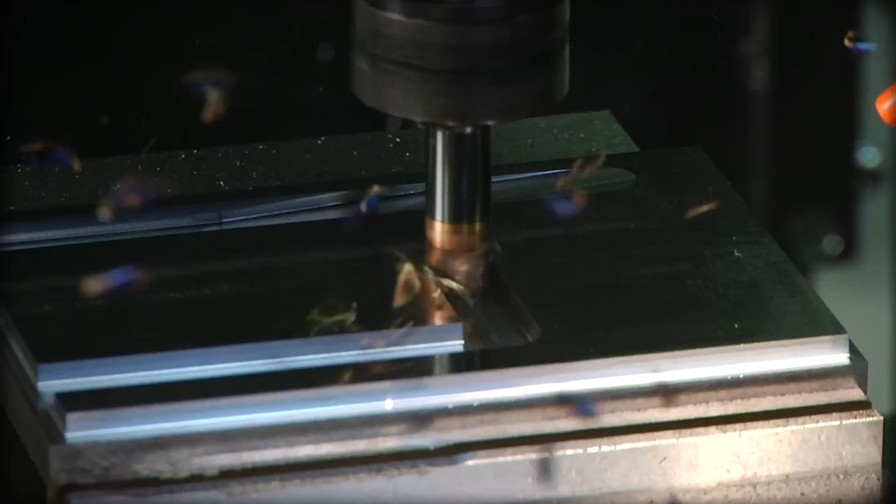Worker training bridges old and new. Veteran machinists now interpret data analytics alongside metal properties. Technical schools near plants teach digital skills alongside traditional craftsmanship, a culture that adapts without forgetting its roots.

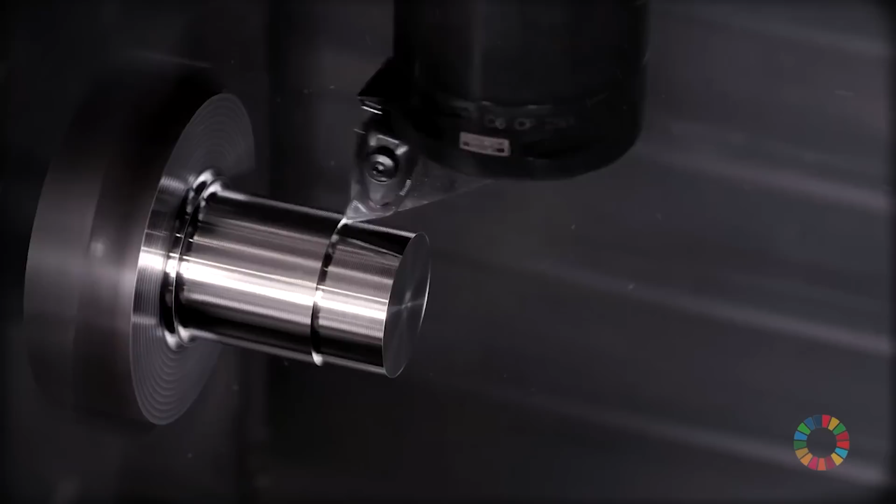Their CO2 goals reveal the same pragmatism. Cutting emissions 50% by 2030 seems bold, until you realize they've already done it while growing business. The solutions exist, implementation just requires systematic effort.

Partnerships with Microsoft on AI tools show how they integrate new tech without losing focus. They don't chase trends, they assess what actually solves problems. Most telling, competing manufacturers often use Sandvik patented methods unknowingly. The company prioritizes widespread adoption over restrictive control, progress over patents.

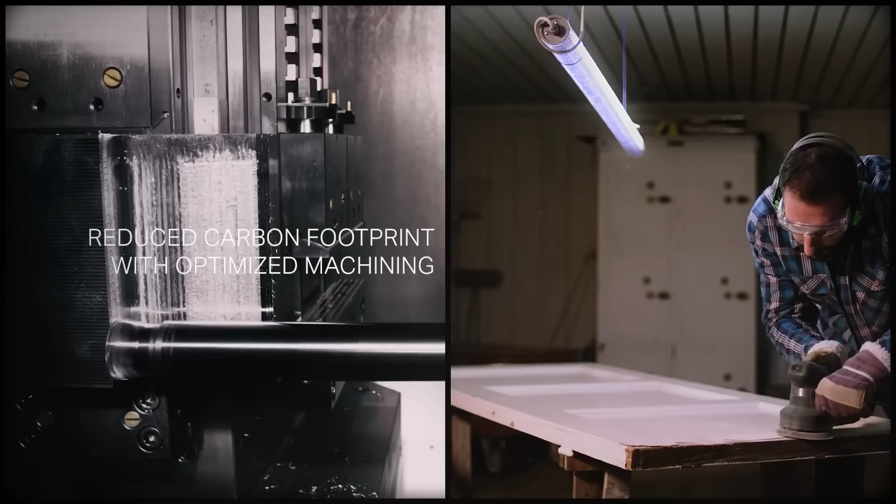Corporate Knights named them a top sustainable company, but you won't hear bragging. When you've transformed industry for 160 years, the work speaks for itself. Now targeting net zero by 2050, they'll get there through countless small improvements. Better insulation here, optimized logistics there, monumental impact delivered methodically.

Our culture celebrates flashy startups, not century-spanning reinvention. But next time you board a plane or use a smartphone, remember, Sandvik's quiet revolution makes it possible. The gears kept turning, unseen yet essential, as they begin their next 160 years of solving problems we haven't even discovered yet.

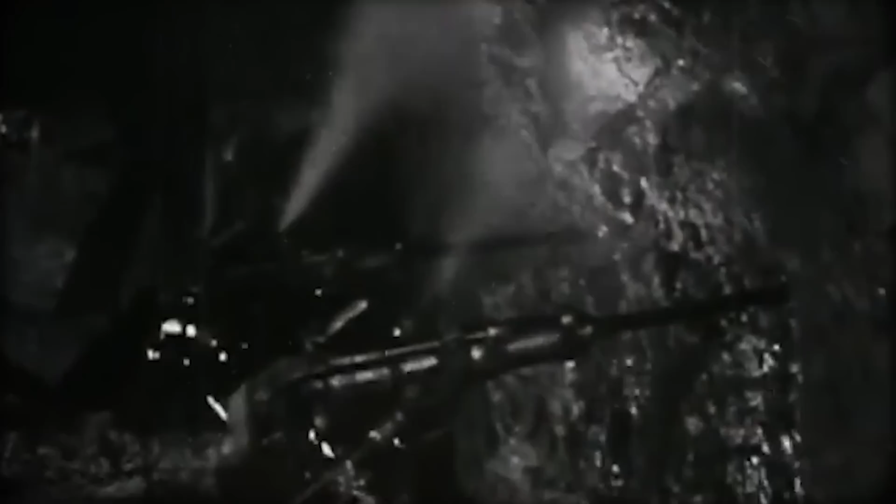Sandvik's 160-year journey proves industrial progress thrives on constant reinvention, not single breakthroughs. That same innovative spirit that saved them with hollow drill steel in 1866 now powers AI-driven mines, all while staying true to Göransson's original vision.

Though their tools often go unseen, they're everywhere. In your smartphone's metals, the wind turbines generating clean energy, and the subway tracks beneath your feet. Göransson's belief that technology should serve both industry and humanity now echoes in every sustainable solution they pioneer.